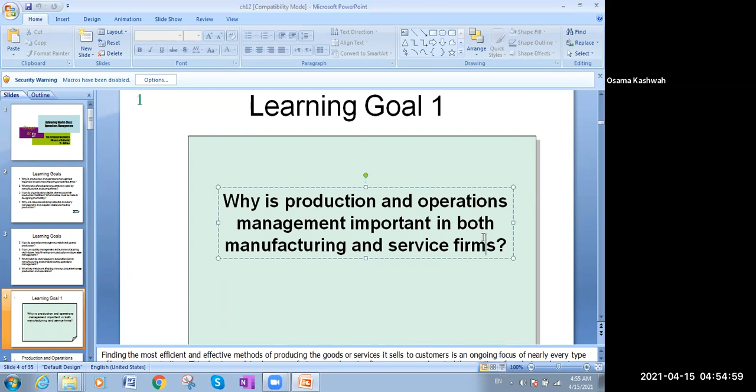Production is very important. What do you mean by production? The creation of products and services by turning inputs into outputs, because we know every system consists of inputs, then process, then outputs, which are products and services.

What about operation management? This is management of the production process. So if production is here, operation management is the management of the production itself.

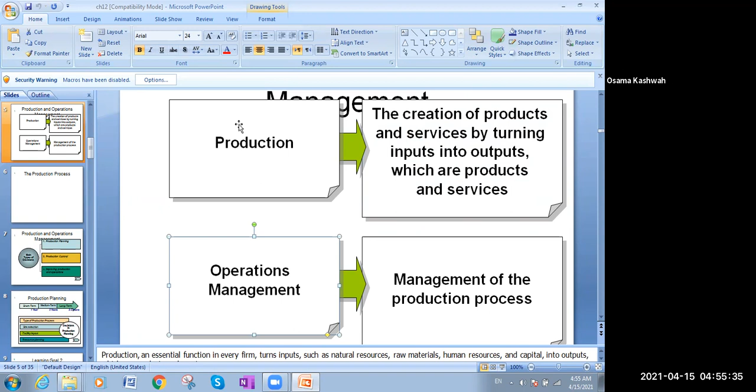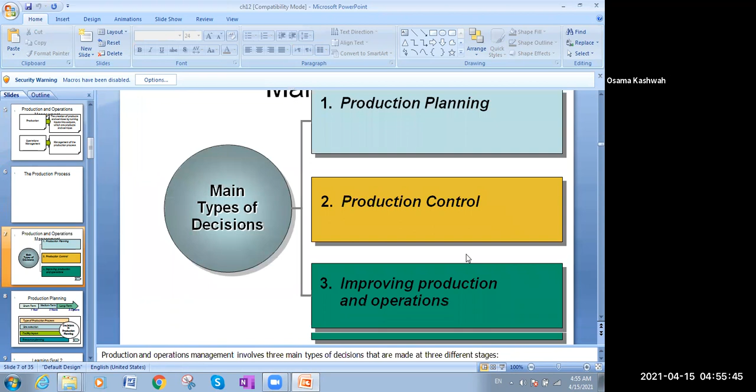We have production planning, production control, and improving production and operations. We have also production planning.

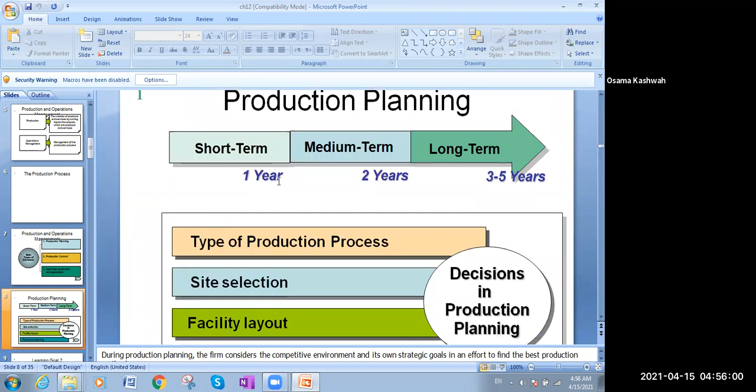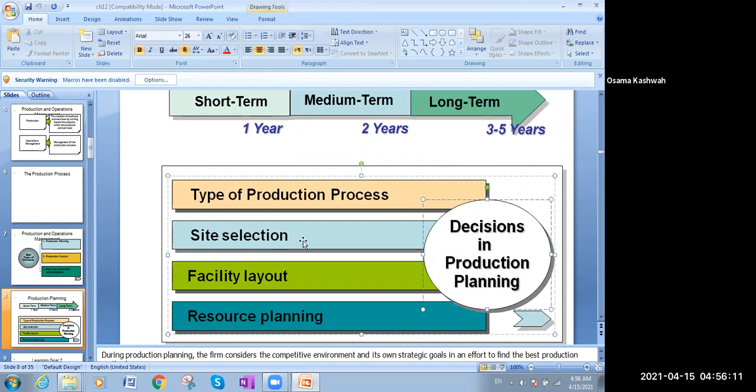There is short term planning, 1 year, medium term for 2 years, and long term over 3 years, like from 3 to 5 years. The decisions in production planning are type of production process, site selection, facility layout, and resource planning.

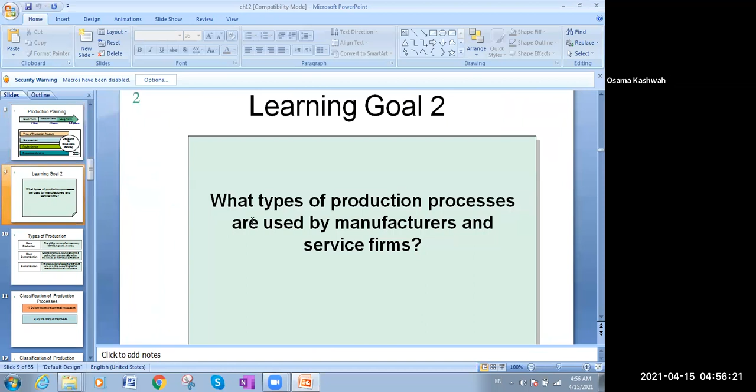Types of production is very, very important. We have mass production. That means you produce a huge amount of standardized products - the ability to manufacture many identical goods at once.

Mass customization: goods are mass produced up to a point, then custom tailored. Custom tailored means we start to see what the client wants and do what the client wants in this product, to tailor it to the needs of individual customers. So it's standardized at the start, then we check out to add or remove things to customize to the business needs.

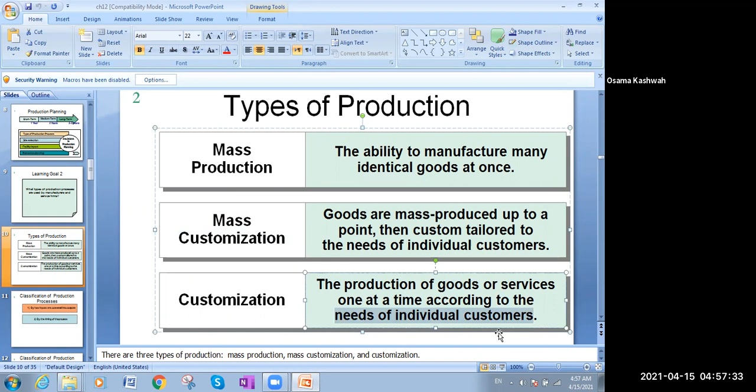Customization: the production of goods and services one at a time according to the needs of individual customers. So this goes one by one based on the customer's needs.

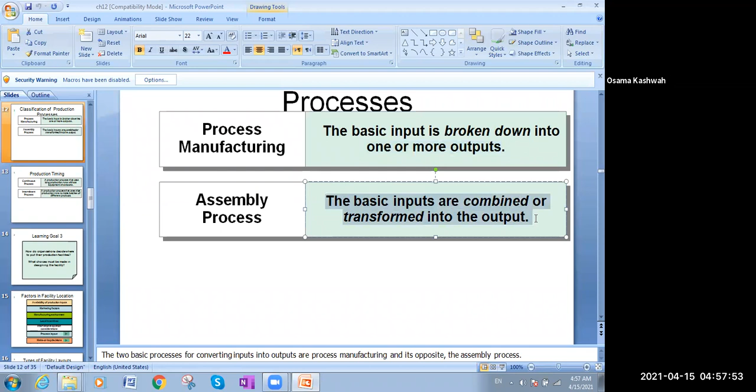Process: the process of manufacturing, where basic inputs are broken down into one or more outputs. Assembly process: the basic inputs are combined or transformed into the output.

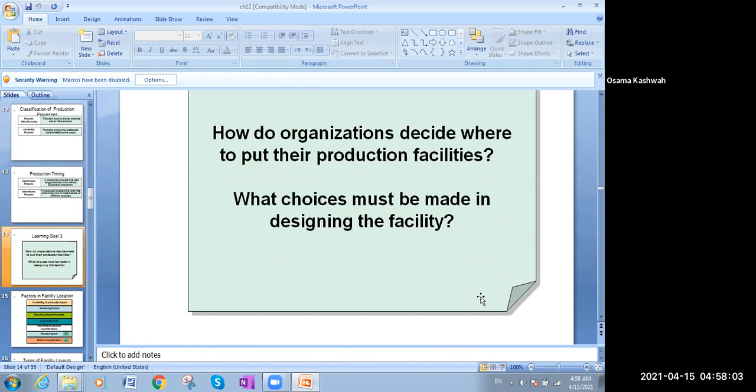Factors in facility location: where should I choose the location of the factory? What are the concerns which make me choose this area or not? The availability of production inputs - are the raw materials close by this site, close by this land? Then I will make the factory here.

Marketing factors: is there a harbor or port close by so I can market my production? Manufacturing environment: how is the environment here in this area, is it suitable for making a factory? Local incentives: are people there around me, so when I need manpower and people to work, shall I find them?

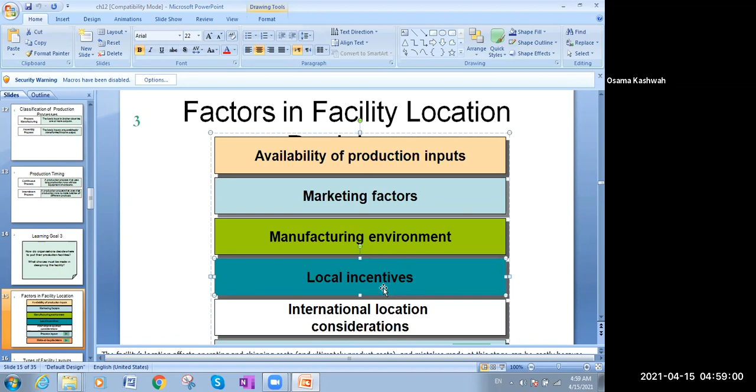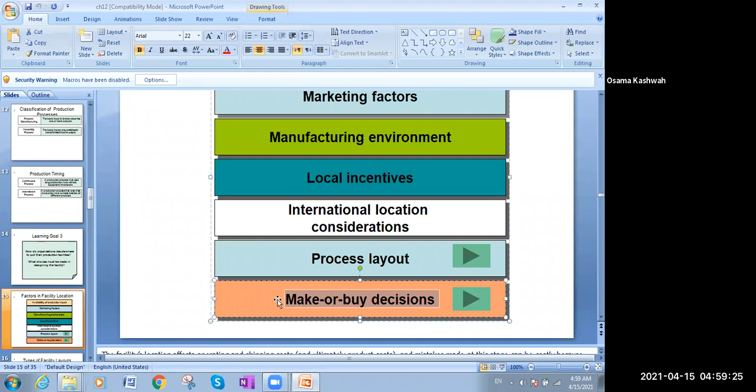International location considerations, process layout, and make or buy decisions. When will I make and when will I buy? I will make the parts I need if the cost of making is less than the cost of buying. But if the cost of making it is higher, then I will buy it - that will be cheaper for me.

How about the layout or configuration of the factory? It's based on the type of product. So we have process layout, with workflow according to the production process.

Product layout: workstations or departments are arranged in a line with products moving along the line. So the product is moving and you are adding to this product.

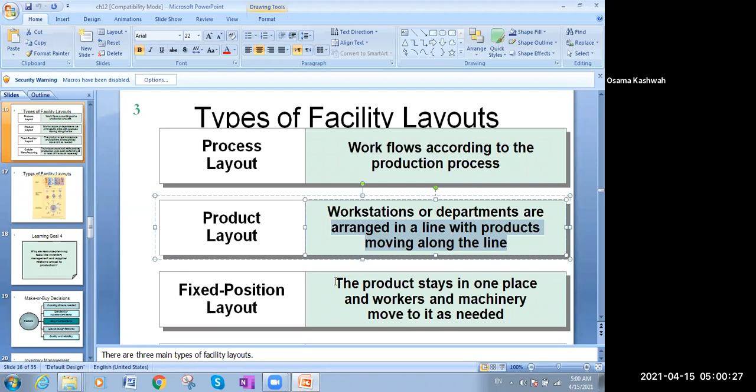Fixed position layout: the product stays in one place, like the planes or buildings in construction. The building or plane stays in one place because it's very heavy, you cannot move it, and you come feeding the plane with spare parts, all in one place, because the plane cannot move through phases or stages of production. Here it shows me those kinds of layouts.

Those are the factors I will consider for the make or buy decision: how much quantity I need of the item. If the quantity I need is so much, that means I better make it. If the quantity is little, it doesn't deserve spending money on making it, so I will buy it.

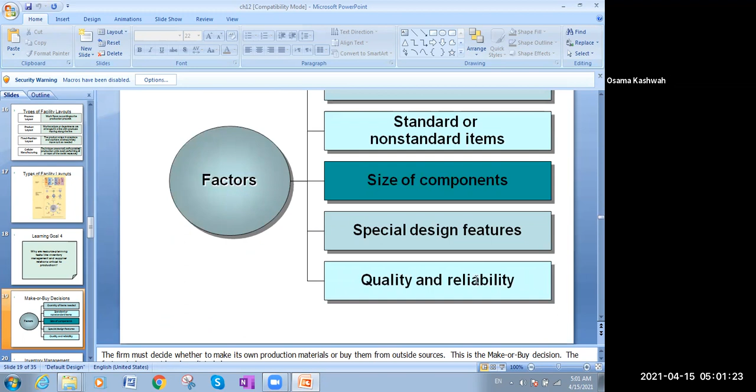Standard or non-standard items: if the items are standard or non-standardized, non-custom, in that case I have to make my decision, buy or make. Also consider size of components, special design features, and quality and reliability.

What is the inventory? What do we mean by the inventory? The supply of goods that a firm holds for use of production or for sales to customers. This is the inventory. Inventory management will tell me how to keep in hand from the inventory because excess amount of inventory is not good for the organization because it costs you money, and the more it costs you, it will affect your profits.

So you have to keep the amount of inventory that you need for the work only, no more, no less. And we have a model, we call it economic order quantity, that governs the relationship of how many units you could keep safely with the lowest possible costs of holding costs and acquisition costs.

What do we mean by the supply chain? This is another job. Supply chain management means what? The goal is the entire sequence of securing inputs, producing goods and delivering goods to the customer. So all the activities that are involved in the movement of goods and services from the producer to the consumer will go in this category. The goal is satisfying customers' needs with quality products and services.

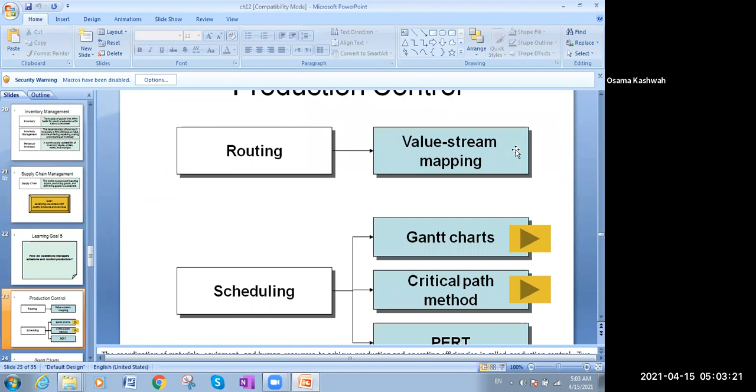Here's what we call the Gantt chart, and I showed it to you also. We talked about it.

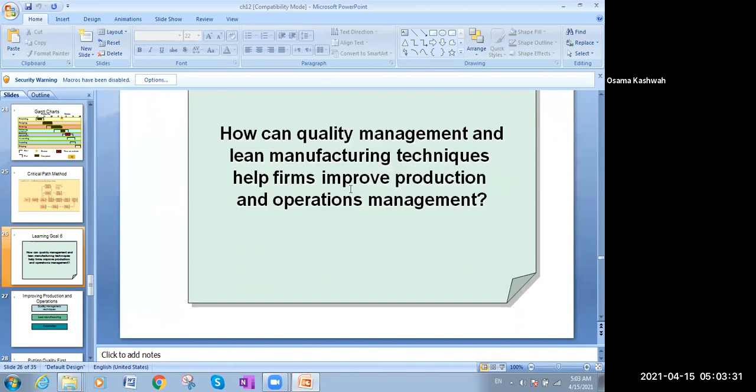Quality is very important for us. Total quality management is a philosophy of continuous focus on quality through all the phases of production. So it includes also continuous improvement.

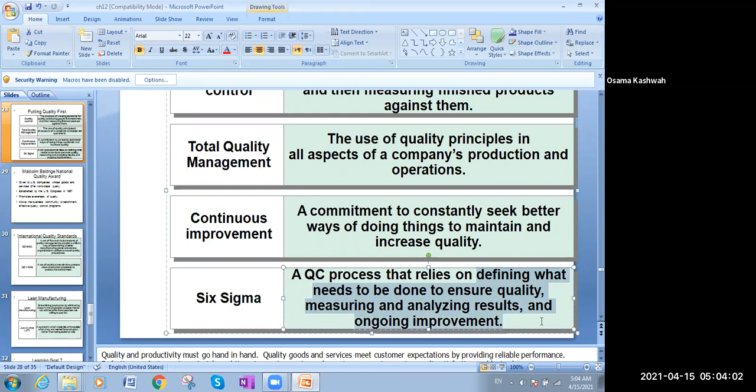Six Sigma relies on defining what needs to be done to ensure quality, measuring and analyzing results, and ongoing improvement.

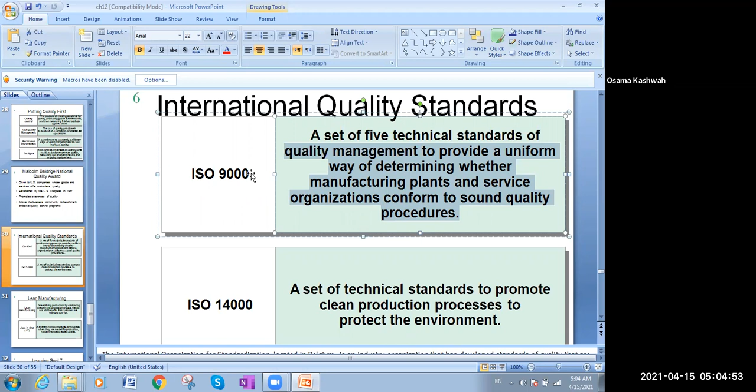We also have to know about ISO 9000. This is for the quality of the products, a set of technical standards of quality management to provide a uniform way of determining whether manufacturing plants and services conform to sound quality procedures. So if you see ISO 9000 on any product, that means it is matching and addressed by the quality standards. It's applying the quality standards 100% - the quality from the raw materials, the phases of production, the inspection, everything is right.

This is ISO 9000. However, ISO 14000 is regarding the environment, one word. It's regarding the environment - is this product friendly to the environment or not? This is what I care about. So, is this product harmful for the environment, like polluting the environment and causing troubles to the environment? ISO 14000 cares about the environment around us, ensuring the product is environmentally friendly.

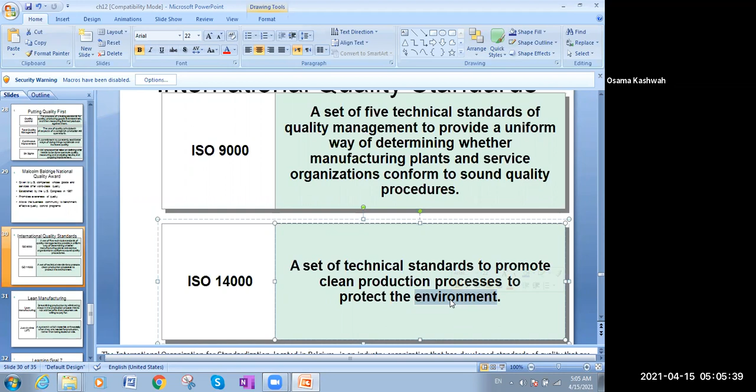Lean manufacturing is streamlining production by eliminating steps of the production process that do not add benefits to the customers. You make the phases of production 11, and they are not worth all this - they should be 9. So I have to eliminate all the unnecessary phases.

Just in time, JIT, is a system in which materials arrive exactly when they are needed for production. Because, as we said in inventory management, you don't need more units as inventory, because this will cost you an excessive amount of money. You don't need to spend it. You only need the inventory which comes to you just in time to produce only what you have to produce. But do not save it as stock, because saving as stock also has its own costs. If you don't need it, don't do it.

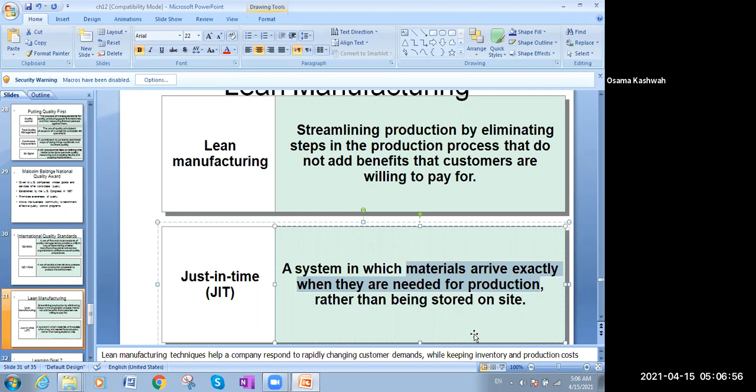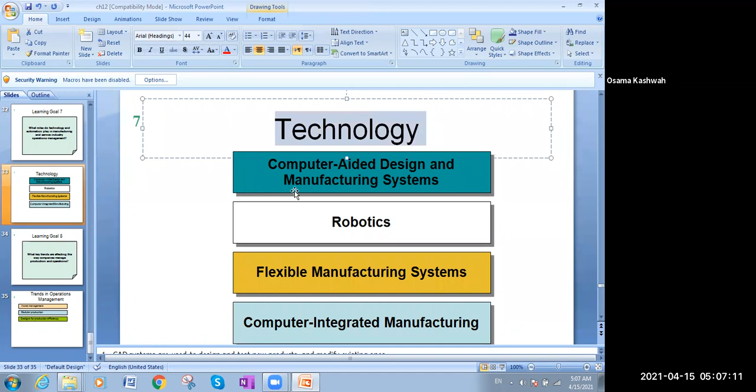Now, the technology and its role in the production system. Technology now affects computer aided design and manufacturing systems like AutoCAD, and robotics. Now you see the factories of the whole world are run by software. Rarely do you find assembling cars or something without mechatronics - all machines that are directed by software - and you don't find too many people working, especially in Japan and Germany. Those countries have this because of the high cost of labor, so instead they use robotics that help with production, and at the same time it does not cost anything.

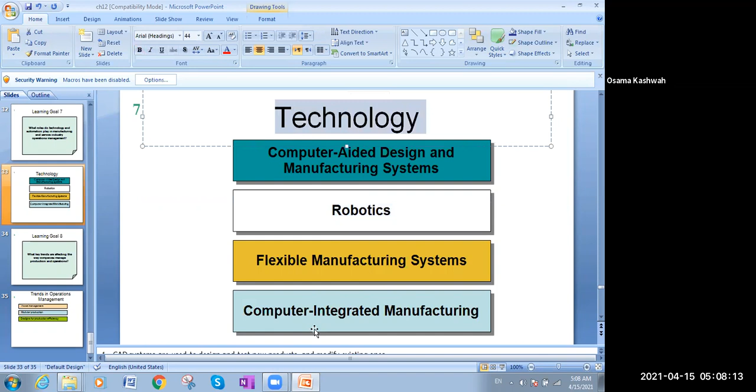Flexible manufacturing systems - this is technology also, the role of technology - and computer integrated manufacturing. So the computers are there to help in manufacturing.